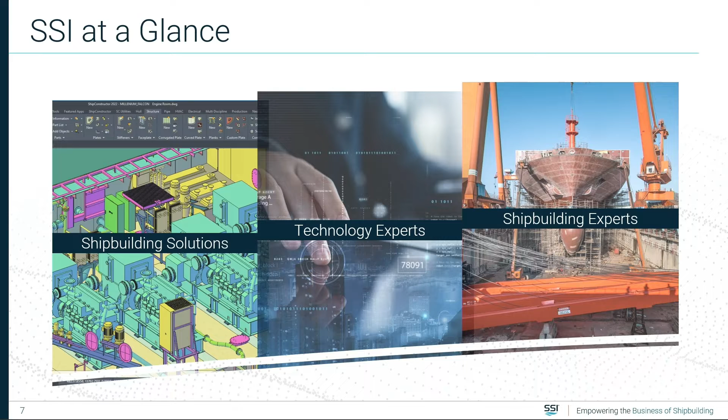So we have people, for example, here. Honored to have the presence of our VP of Sales and Operations, Pat Roberts, here, who's worked with us for over 17 years, and who's come from working in the industry for, I won't say how many years, Pat, but it's been a long time. In the US office and in Canada, we have a lot of people with that shipbuilding background, so we have expertise not only in developing software, but also understanding shipbuilding needs and requirements.

We've been in business for over 30 years. It's a privately owned company, 500 clients, 7,000 licenses. We do a lot of work with universities and technical colleges as well to make sure we can help the younger generation coming up to speed to use our tools. That's been a very positive strategy for us, because right now in North America, if you ask someone to provide their CV as a shipbuilding designer, you'll see they have ShipConstructor

in their CV. We have a wide range of clients, both commercial and defense. Today we're going to be focusing more on the defense sector. One of the key things here is we work with small, medium-sized, and large clients. One reason that's important to stress is that we have a key goal at SSI that our software needs to be easy to use. We're always developing software that takes complex problems and tries to find ways you can approach and solve them with a user interface or approach that's easy for the end user.

So a very impressive track record in the defense sector, over 750 ships in the water, some familiar names. I think there are even companies here present today, such as Ingalls. We range in vessel size from patrol boats all the way up to the LHA class there, Huntington Ingalls. That shows the scalability of our software and the capability to cost-effectively address the needs of our clients in various sectors of the business.

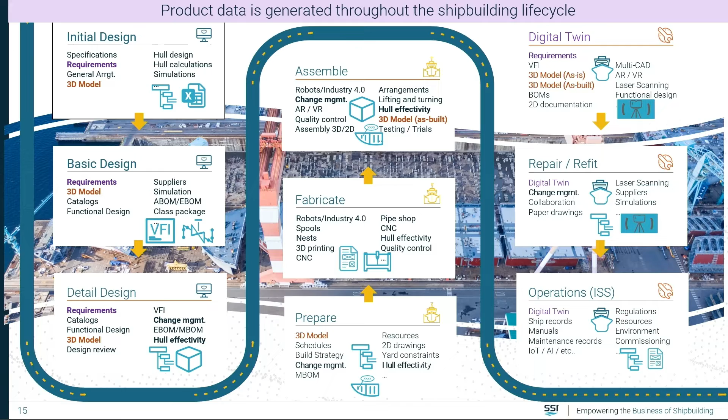But what makes shipbuilding really fun, so I say fun again, is this. So it's all happening at the same time, right? And that's what makes it so tough. You do not have the happy path of waiting for engineering to be over before you start creating your MBOM model and your procurement and then your manufacturing.

So you have effectively concurrent digital threads that are going on. They have interdependencies. And this is still, shall we say, an optimistic way of looking at it, because you don't have change management kicking in here. When change happens as part of this, then you get much more complexity in terms of how you manage the processes. So the key message here, why is shipbuilding so hard? Why has shipbuilding found it so hard to implement PLM effectively? Because the processes are essentially concurrent and complex.

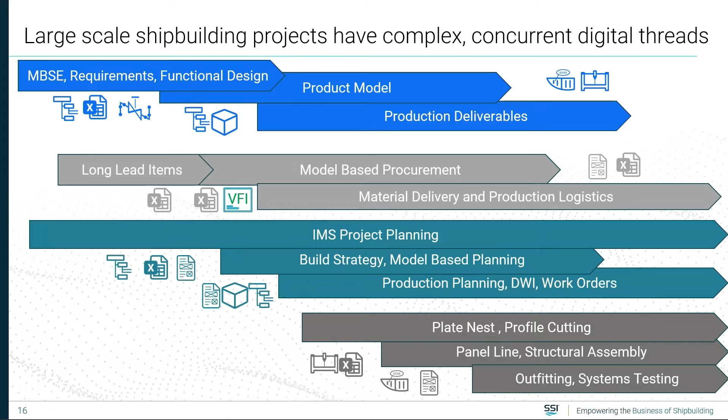So shipbuilders are smart people. They don't wait around for problems to be solved. So they started solving the problems themselves. They typically start creating in-house legacy systems. And then when they do approach vendors, they often find that the vendors don't even understand that specific process and how it needs to be addressed.

And what we find is, when we walk into shipyards, and clearly Ingalls have moved away from that and are already in a much better state of their enterprise architecture, but a lot of shipyards we still find are stuck with messy, inefficient enterprise architectures for their data management.

So our digital shipbuilding platform, Shipbuilding PLM, which is this vertical solution developed on top of Aras, it's the backbone of that, and we see it as being able to unlock efficiency gains. I swear I did not change my presentation because there was the Aras theme of unlocking innovation. It was already there, so it was a fortunate coincidence. When I saw that, I thought, oh, that's nice.

And it's fully integrated with SSI's industry standard ShipConstructor 3D CAD/CAM system, and also now, because we're getting into earlier stages of the design lifecycle, integrating with Autodesk schematic drawing tools.

Current capabilities: the full digital thread from requirements, functional product model, production design, hull effectivity. To remind everyone here in the room, I think it's a lot of capability, and the key thing here is there's a lot of this capability out of the box because it's a vertical solution.

Okay, so if we now look at the shipyard, when you're building the digital ship, Shipbuilding PLM is going to be the hub of configuration controlled information from engineering. Of course, SSI has an approach where we understand we need to talk to other systems.

Both our own platform and the Aras platform provide the capabilities to integrate with other systems. And it's not only that, we develop partnerships with people who are also specialized in shipbuilding. For example, recently, Floorganise, a company that some of you might not be familiar with, but they're a Dutch company specialized in manufacturing execution or shipbuilding planning. We've been involved in an SRP project with them as well to get that rich data set to feed their system.

So it's important to have the technology, but also develop the relationships to deliver these shipbuilding-specific solutions as well. So you've got that rich data set, and then you've created that. Now, obviously, you have an opportunity to hand over information. And of course, we know that in the industry, who's going to pay for that digital ship is still an open question in a lot of contracts, but the data is there, and how much data you need to hand over is something that's still being fleshed out in different scenarios.

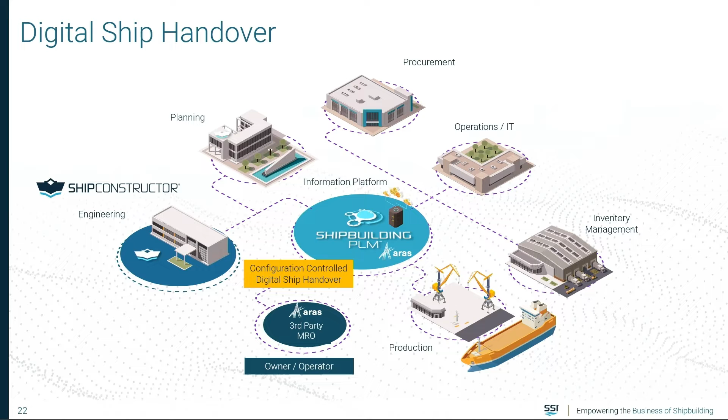And then, of course, you have an opportunity to then use that data set later for fleet sustainment use cases.

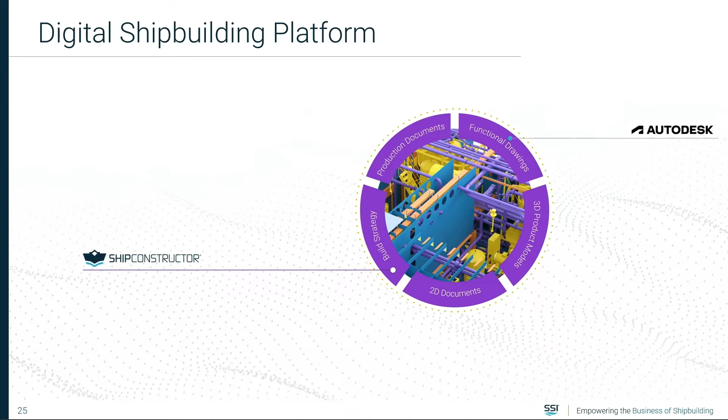Okay, I'll do a quick overview of the platform capabilities. So again, ShipConstructor is put there together with Autodesk as handling the design part of our solution. And then we have Shipbuilding PLM with a wide range of capabilities, again available as part of the core product.

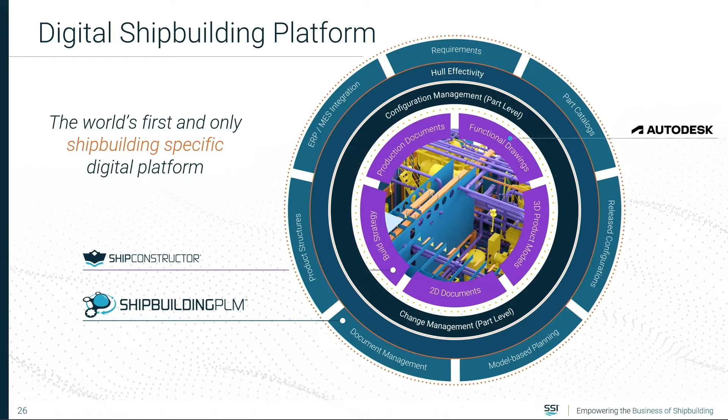And we do say it's the first and only shipbuilding-specific digital platform. So there are other PLM vendors who have played in the shipbuilding world, but we are the first to provide out of the box a pre-configured vertical for shipbuilding.

So we have a series of applications on top of the Aras platform to manage all that rich data set. A lot of this is familiar for those of you who are also in other industries as well, but it always has that shipbuilding specific characteristic and need to adapt to those use cases.

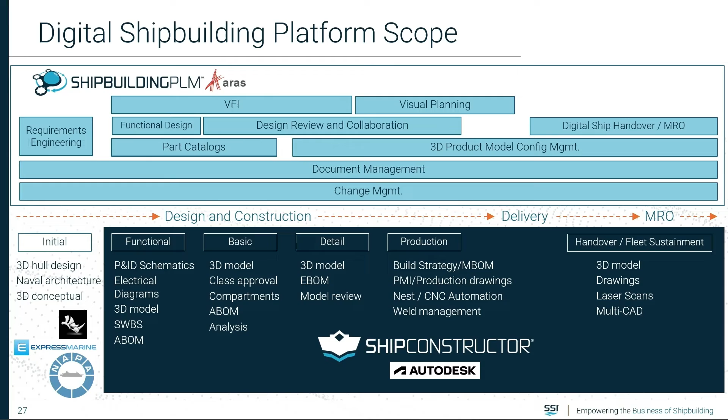And that's what we've done, right? We've taken the Aras platform, and what we're seeing here is, for example, on the left-hand side, that's just the ShipConstructor data that we're managing, but we're also managing more than I can even fit in one screen. There's requirements down there as well that we've also touched. So every item type there, they've all been touched by us, and we've added additional data structures, coding to support that rich digital thread.

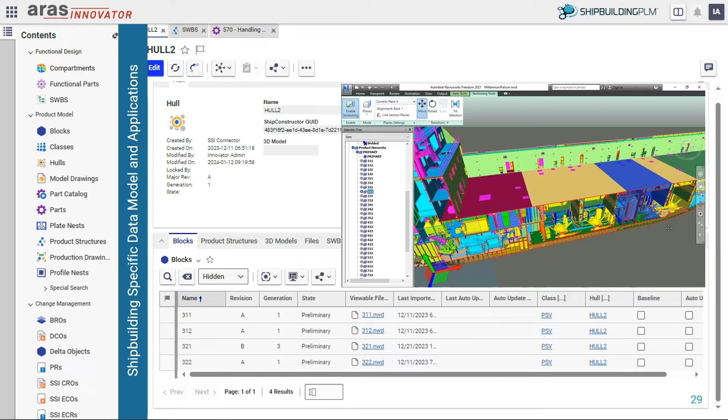And that's something that when we look at the industry, one of the challenges of PLM is typically a vendor would turn up with a core PLM capability. Aras had faced a similar scenario when they went to Ingalls, but of course Aras had a low-code advantage and also had us in the room to help with that implementation effort together with other partners. A lot of customization is done to address those gaps because people don't provide a shipbuilding-specific solution.

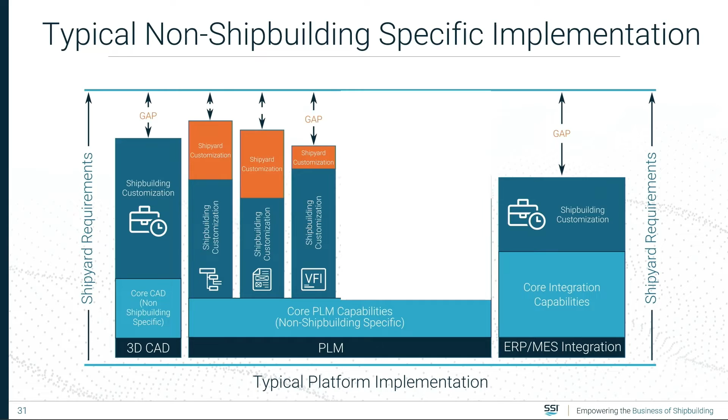But with our approach, because we provide shipbuilding applications, you're essentially facing a configuration problem afterwards. So it's much easier to achieve a rollout that addresses those gaps, and you can do it incrementally. You don't have to do a big bang where you've swapped everything out.

Of course, no one is going to, to Casey's point, what they have now is good, but clients are always changing, so you might need to address future requirements as they change as well. So we're going to carry on developing our applications as well.

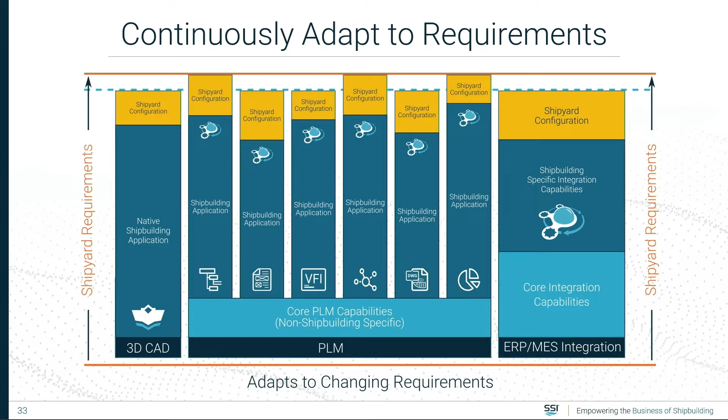So it's a digital platform for the complete shipbuilding lifecycle.

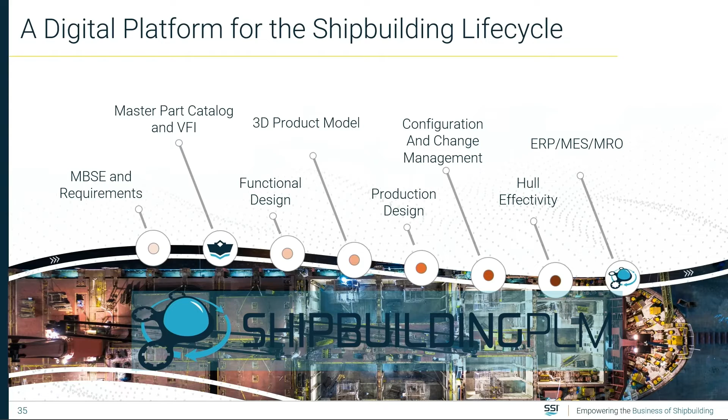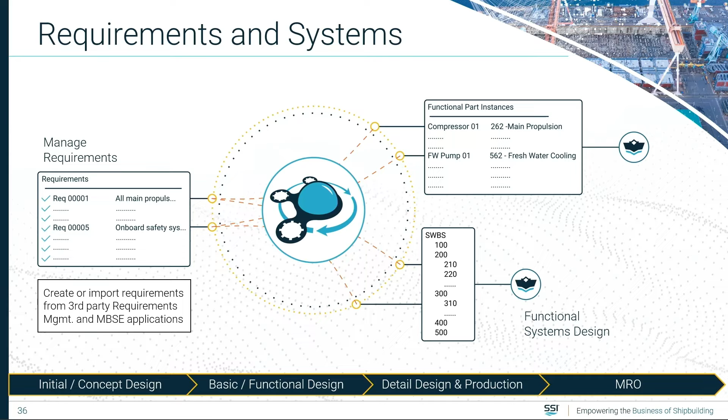Just to whiz through here—it's how we connect that digital thread. We have requirements management linked up to SWBS structures, systems, and functional part instances. We import from Autodesk schematic tools, for example Plant 3D and basic AutoCAD and other diagram tools, with functional parts linked to the drawing and then linked to the SWBS.

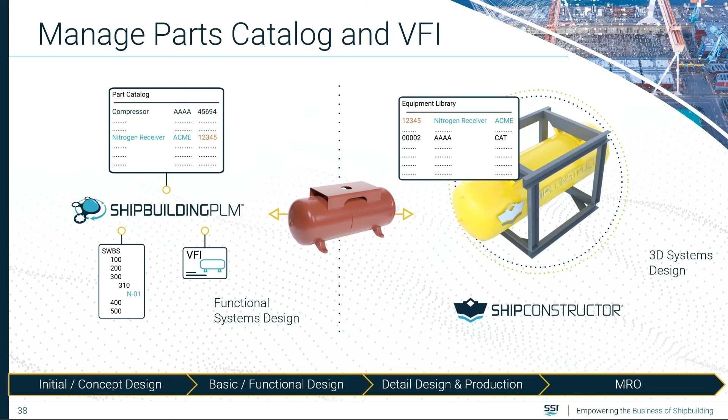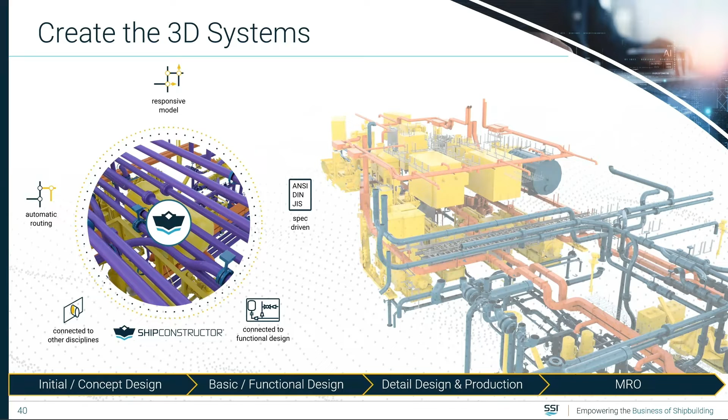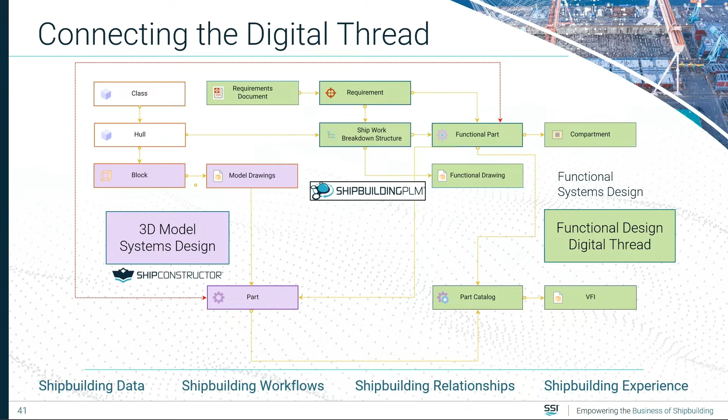We have a part catalog management capability, because it's very important to manage maturity of parts and determine applicability of parts in the shipyard. Then you start creating your 3D systems, which need to follow what you've defined in your functional design phase. So here we see the digital threads being connected already from the functional world to the 3D world. That allows you to leverage information and connectivity, being able to see related VFI as well within the platform.

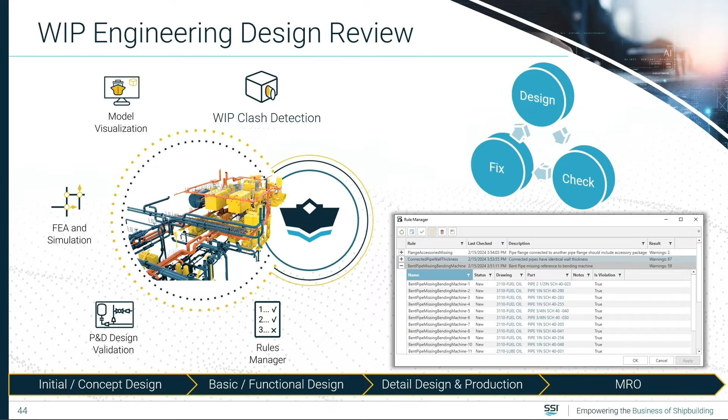Casey mentioned rules-based design—this is more on the design side of the use case specifically. We are aware of that need, and we've been developing capabilities for rules management. That's an area we'll carry on having further conversation to evolve as we move forward. The key aspect here is there's an advantage to moving to the left, making sure designers can resolve their problems earlier before going through a multidisciplinary design review. So we're providing better tools within the ShipConstructor platform to manage those requirements.

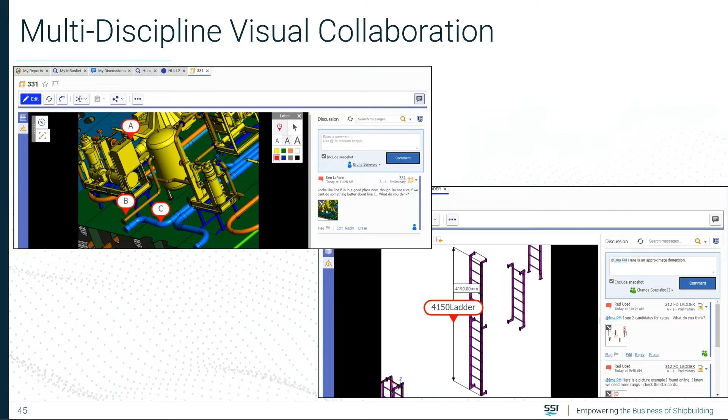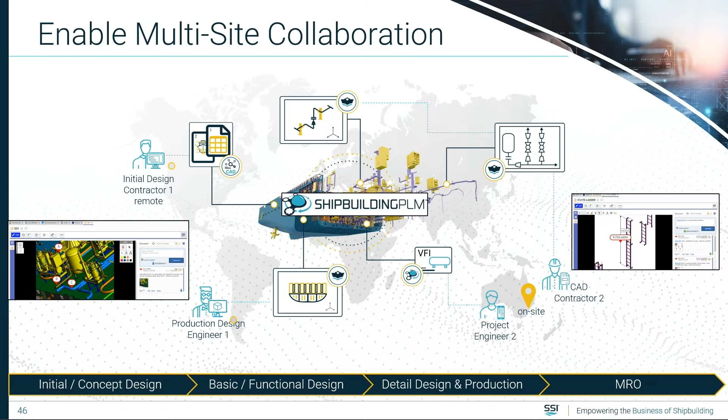As well as the capability to work in a collaborative environment in ShipConstructor, you also need multidisciplinary visual collaboration. One of the key things, as Casey mentioned, for a new program that Ingalls are involved with another shipyard, is the capability to collaborate. That's an area where we leverage the 3D visualization and visual collaboration capabilities of the Aras platform.

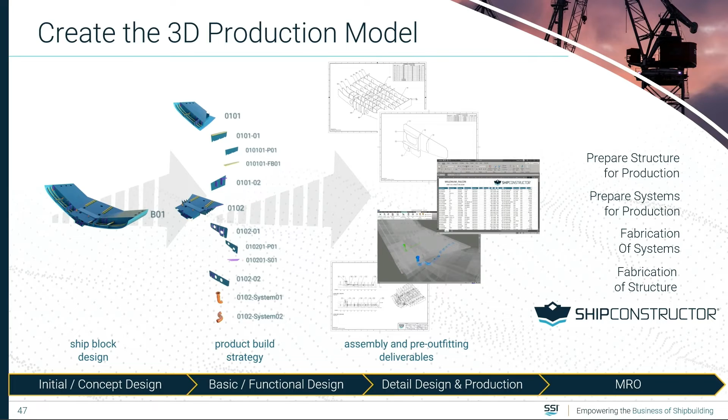Now you're at a stage where you're creating the 3D production model. As I mentioned, we have the capability to define an assembly sequence, or multiple assembly sequences, in ShipConstructor. That's a rich data set that you can then leverage in shipbuilding PLM as well, for other downstream use cases.

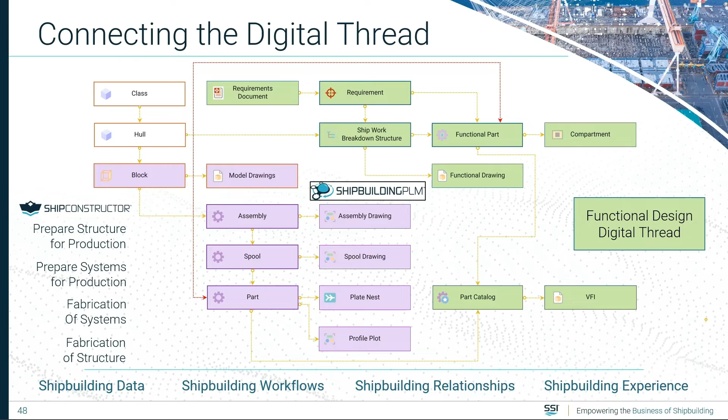So now we've completed—this is simplified, there's more information of course, but the diagrams get too messy—we've brought in that rich data set from ShipConstructor and connected it up to the digital thread. So now we can leverage things such as assembly sequences within our 3D visualization.

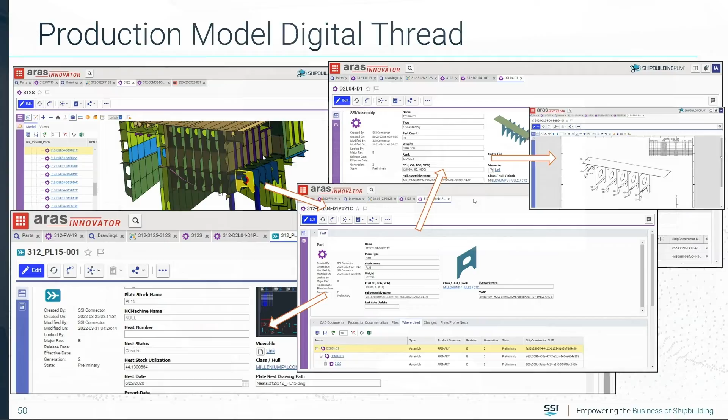And the digital thread is down to the part level. So for example, that plate element there—if you change that hole, we will know all the other affected items as well: the sub-assembly, the plate nest, where that plate part's used. They will all be configuration controlled in Shipbuilding PLM without requiring any user input. The change is something we're aware of, and we can automatically capture that change as it happens.

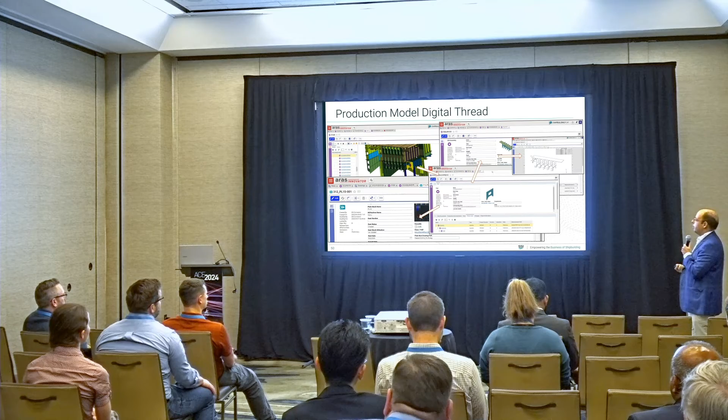As Casey mentioned, there's a transition happening in the industry to move away from production drawings to model-based approaches. Right now, we believe it's a transition, so we're offering both worlds and making sure configuration control ties them together. That production drawing is always lined up with that 3D lightweight assembly, which you can investigate, take off dimensioning from, and perhaps start a problem report from.

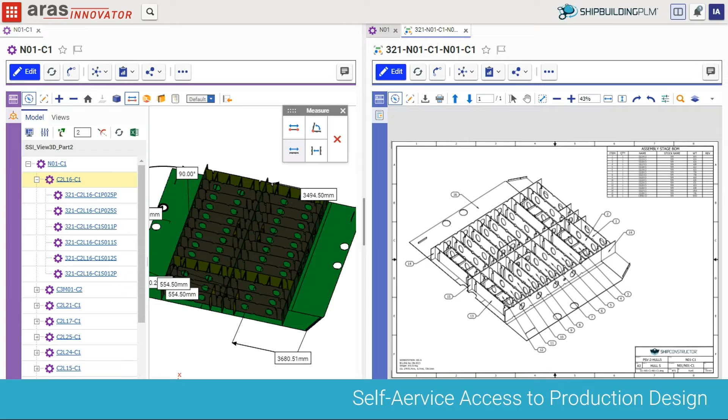There's a typing error that came in there—self-service access to production design is what we meant to say there. So self-service production design is a key aspect in terms of our approach.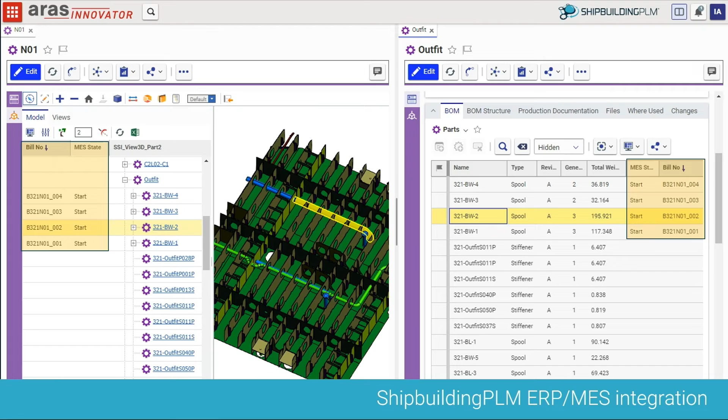Again, the important thing is we've provided that rich data set, the configuration-controlled data set, for you to be able to do this and make sure it's been reviewed and approved before production actually starts looking at this. And of course, that data set can then also be integrated with third-party tools as well.

If I was going to talk about change, I'd probably need another 20 minutes or so, because I think I'm probably running out of time already. But change is a significant risk.

As we saw from that process earlier on, think about having a late change coming in during functional design, for example—this will happen in a ship where construction takes a long time, the actual engineering takes time, and you've got sister ships as well. So you will inevitably be facing change as all of this is still going on. One of the key things is being able to track change and be aware of all the change happening in engineering, and how it impacts related products.

You can only do that if you effectively have a connected digital thread. As a foundation capability, we need the capability to understand that data set and allow people to do scoping of change. We've taken the basic ECR objects in Aras and adapted them to understand our data, including cases where functional change happens at the same time as product model change, which is a use case that does happen in shipbuilding.

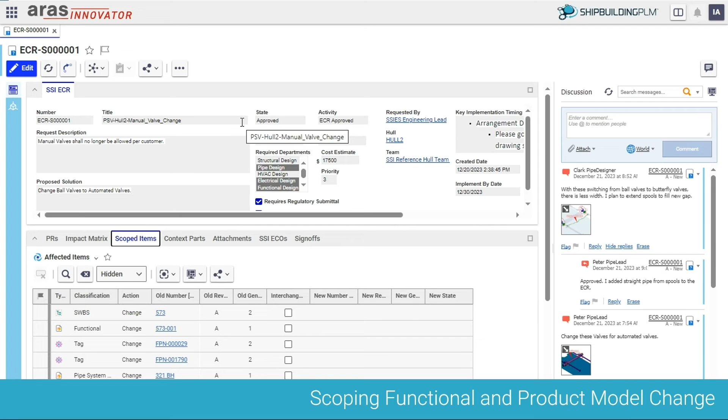So leveraging visual collaboration, and again, because it's part-centric, we're swapping those valves there. We can see impact to other items as well. We can probably impact those spools, the pipe there, and probably the spools.

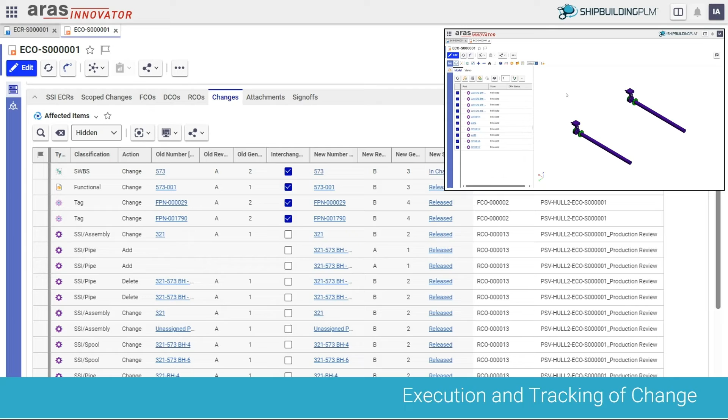Here we're now tracking what has actually happened in terms of change via what we call our parent ECO object, our SSI ECO object, making sure that ECR shows those scope changes, so you can effectively see if what you've executed in terms of change aligns with what you've scoped. We provide the ability, when you've got a huge ship, to see just what's changed in a specific area. So for example, there we're seeing the actual execution of change, a quick visualization of what's actually been executed in terms of the 3D product model change.

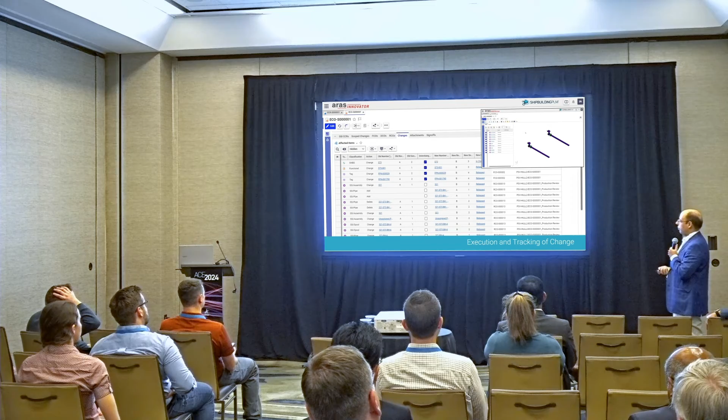So some key takeaways from our platform. It's shipbuilding-specific, out of the box, part-centric data model and digital thread, centralized product data repository. I know perhaps this sounds a bit over commercial, mentioning this out of the box, but we have to emphasize that it is a differentiator. Being able to install shipbuilding PLM with everything you saw today, there wasn't one customization done to provide any of those forms, any of those data models—all of those capabilities are there out of the box.

Of course, you need to adapt them to each client from workflows, additional properties, but there's a lot of inbuilt capability, right? And that allows you—I'm going to get it right this time, Pat. I tried to get it around first base, second base, third base, and I got it wrong the other day because I'm not familiar with baseball as much. But I would say it allows you to start on third base. There we go, got it right. That's closer to the home run. There we go. Okay.

So, of course, we can't do this all by ourselves—we need strong partners. And Aras has been an excellent partner for us, both on the technology side and on the relationship side. We've known Aras for a long time; the first ACE I went to was in 2016, so there's a lot of familiar people at Aras. They have a very open, transparent relationship, very much focused on solving problems, and they understand that we're providing a vertical solution on top of their platform and want to support us.